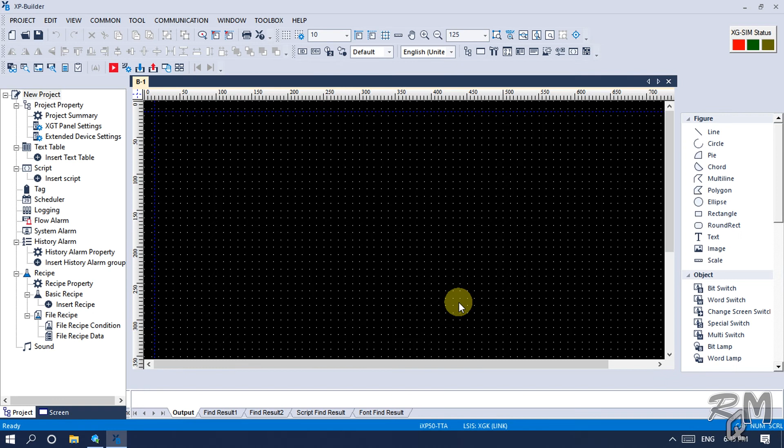In XP Builder, this main black window is the HMI screen and our working area. On the left side is the project window tree, whereas on the right side there are a lot of drawing tools and HMI objects like switches, indicators, etc. Now I will create the start and stop button by using the object tool.

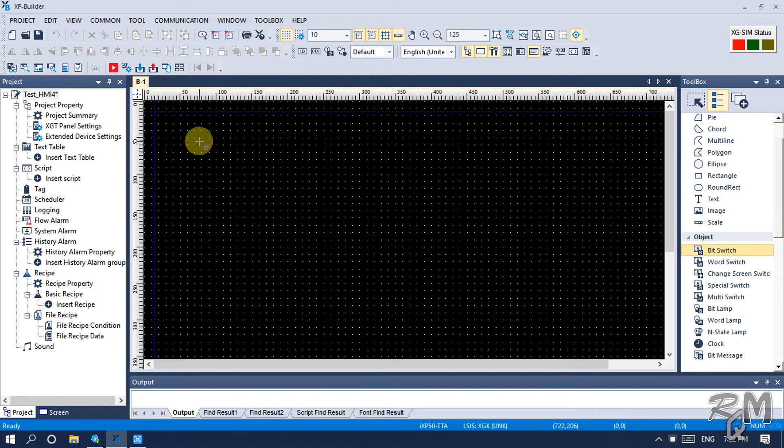Select bit switch, click and hold the mouse button and drag to create a bit switch. As I release the mouse button, the bit switch property box will open. Here enter the address of the start button. Come back to XG5000 logic. You can see the name of the input, but there is no address.

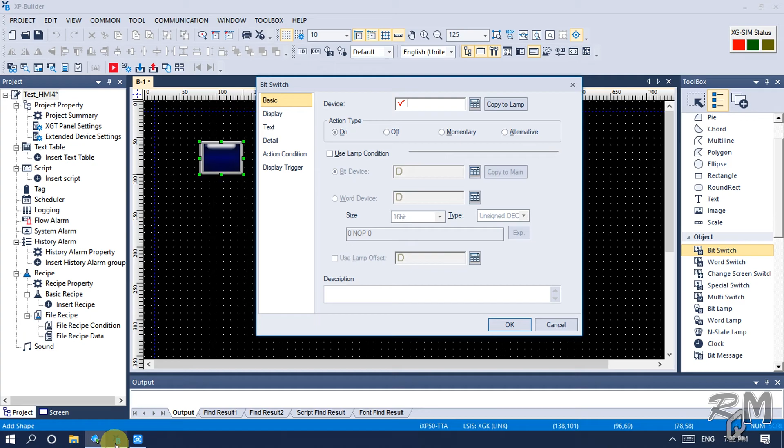To make the address visible, click on the view menu and then click on devices/variables. Now you can see addresses and names of all objects. Start input address is P00000. Go to XP Builder and enter P00000 in the device box and for action type select on.

Click on display, uncheck use reverse image. On state is bright and off state is dark, then click OK. Click again bit switch and create another switch for stop. I think it is better to create a copy of the start switch to get the same size. Copy with Ctrl plus C keys and paste with Ctrl plus V.

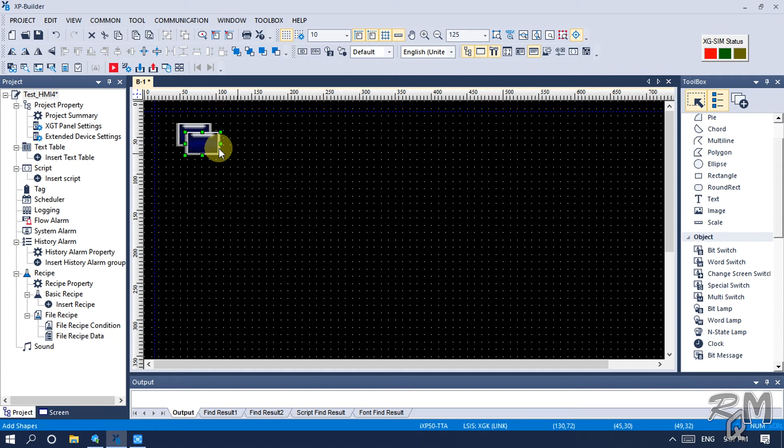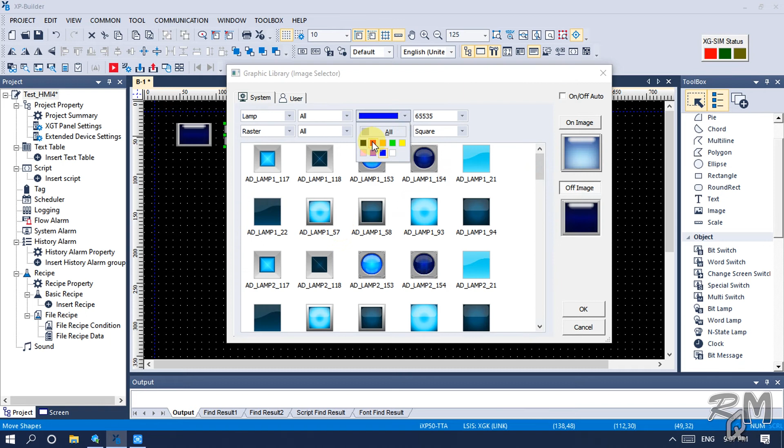Place the stop switch on the right side of the start switch. Stop input address is P00001. Double click on the stop switch and enter address P00001. Keep action type on. In display, uncheck use reverse image. Then click on library. Choose color red. Change off image to dark red and on image to bright red and click OK.

Now it's better to test these switches. Make sure XGSIM is on, the simulator monitor button is active and it is in run mode. Now run the HMI simulator. After loading, you can see two buttons in the HMI screen. When I click on the buttons, colors are changing. Move the HMI screen to the right side, switch to XG5000 and reduce the window.

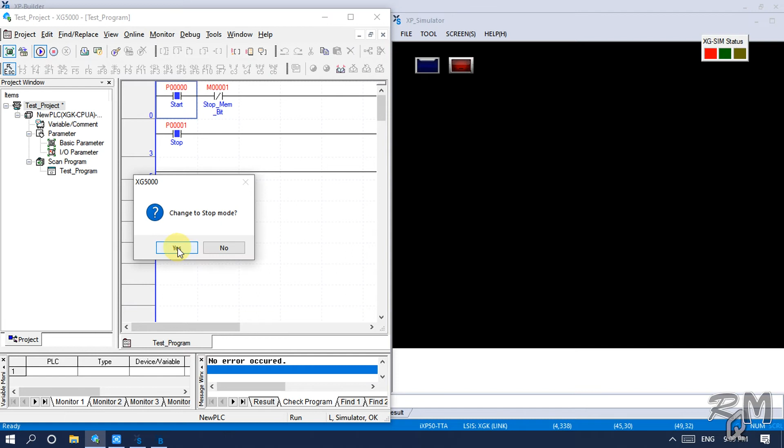You can see in the logic, both start and stop inputs are active. Now if I again try to switch off these inputs from the HMI, they will not switch off. To deactivate these inputs, I have to stop my PLC simulator and start again. Again I click on the start button, the input switched on, but it is not switching off. Same thing with the stop input. It is not right for my logic.

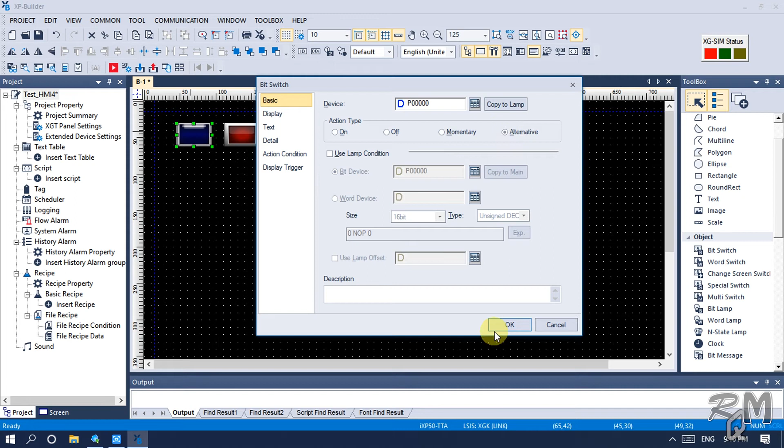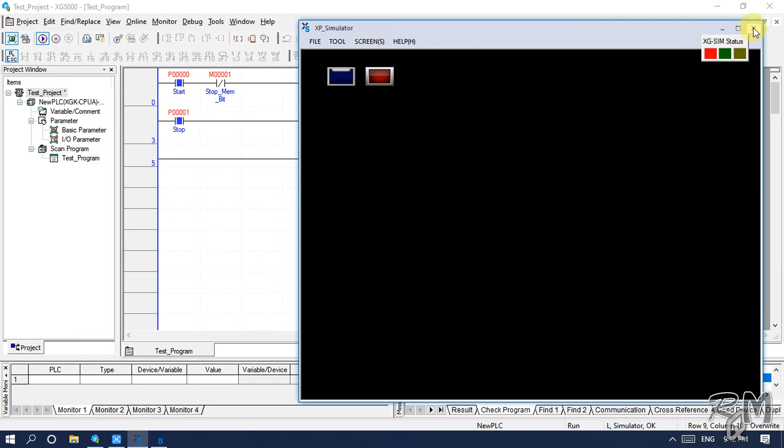To make it right, close the HMI simulator, double click on the start switch and change action type from on to alternative and click OK. Do the same with the stop switch. Run the HMI simulator again. Now I will test both switches with the logic. Now both are working fine. Confirm start output. Start memory bit is also activating. Switch off both inputs and close the HMI simulator.

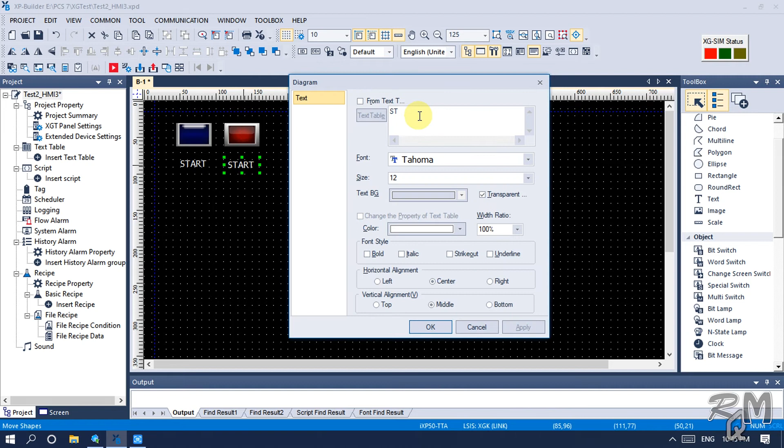Now I will label both switches. Click on text, then click and hold the left mouse button and drag, then release the left mouse button. Type start and click OK. Move it up, copy and paste start and move it under the stop button. Double click and change the text to stop. Check on bold and click OK. Double click on start and make it bold too.

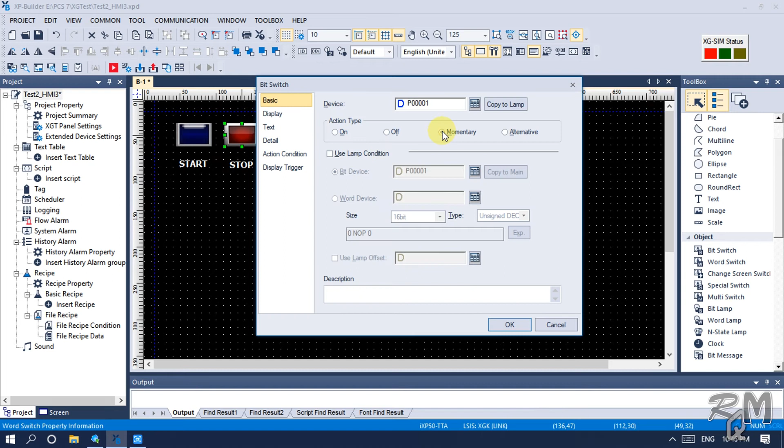Now double click on the start switch. Regarding action, in PLC logic momentary action is usually recommended. It is like a push button. When you keep it pressed, it remains on and when you release, it becomes off. So I will change action type to momentary. Also change action type to momentary for the stop switch. Now save the project and run the simulator.

Verify logic functionality with HMI. Start switch activating start input and stop switch activating stop input. Scroll the logic to the left side to check outputs. Click on the start button. You can see the start memory bit is also activating, which is good. Stop switch is also activating the stop memory bit.

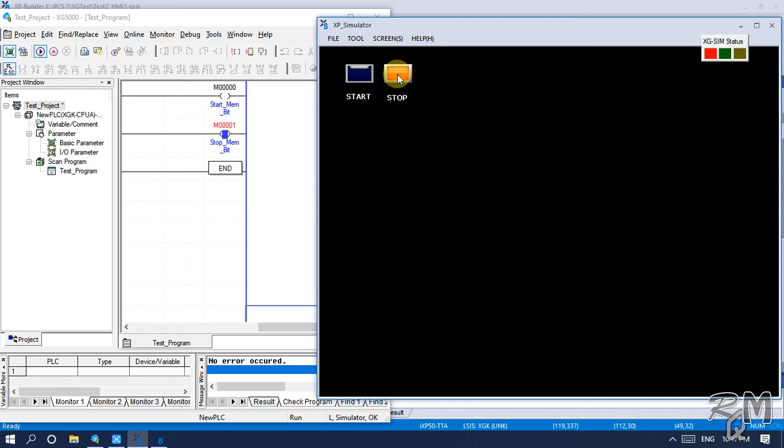Now I will create latch logic to hold the start memory bit. First create line space after start ladder logic. Left click on left side of ladder, it will select complete ladder. Now drag this ladder down.

You can see caution sign and ladder is not moving. It is because currently XG5000 is online and PLC is also running. Stop PLC and deactivate monitor button. Select end ladder also with shift key and move both down.

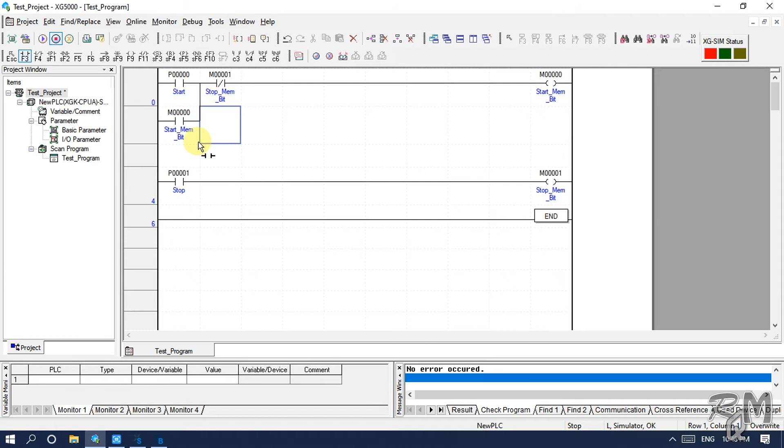Now select vertical line and click after start input. To create latch logic, I will use contact of same output coil, which is start memory bit. Select normally open contact and click on second step and select start memory bit from variables table. Click on arrow and select stop ladder and move one step up.

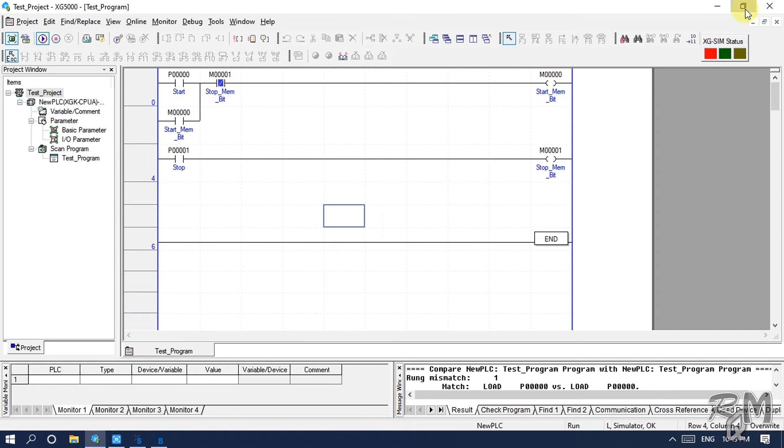Now go to project and save project. Click on monitor button, then click yes, click OK. Change PLC mode to run. Come back to HMI screen, click on start button. Input is activating but output is not latching. This is because after change I didn't write or download changes in PLC.

Stop PLC, click yes. Now click on write button, click OK. Now run PLC and again check start logic. Now you can see latch logic is working fine. Now click on stop button to unlatch the start logic.

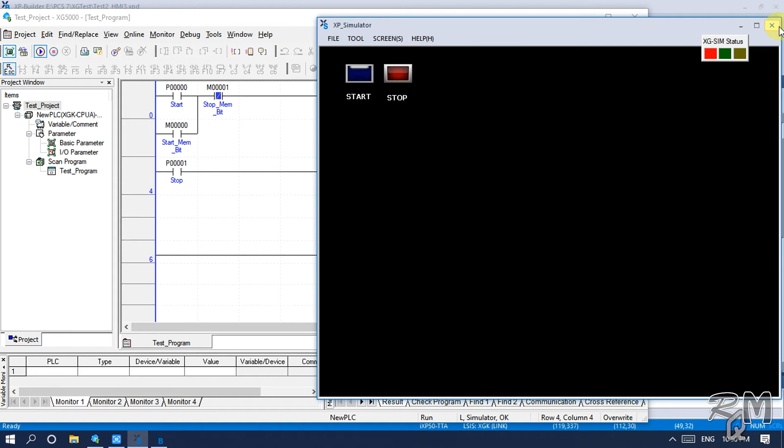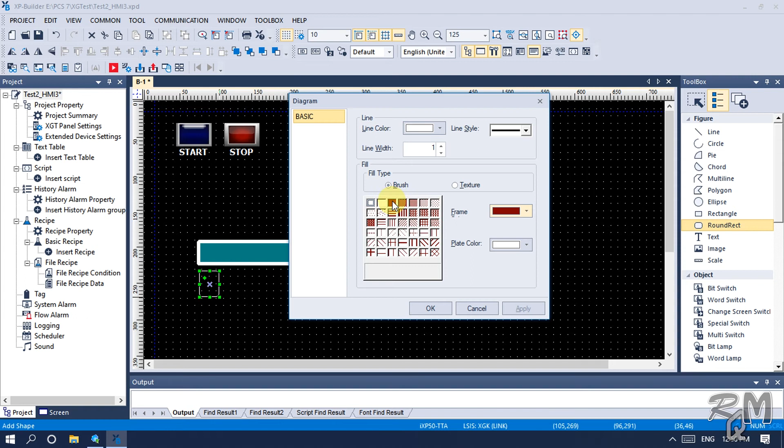It is better to create HMI project first, then create its logic. Select rectangle and draw rectangle for conveyor belt. Choose color, select straight line and increase the width of line, then click OK. Now create conveyor motor with round rectangle tool. Choose fill color and click OK. Create small shaft with rectangle tool and fill with different color.

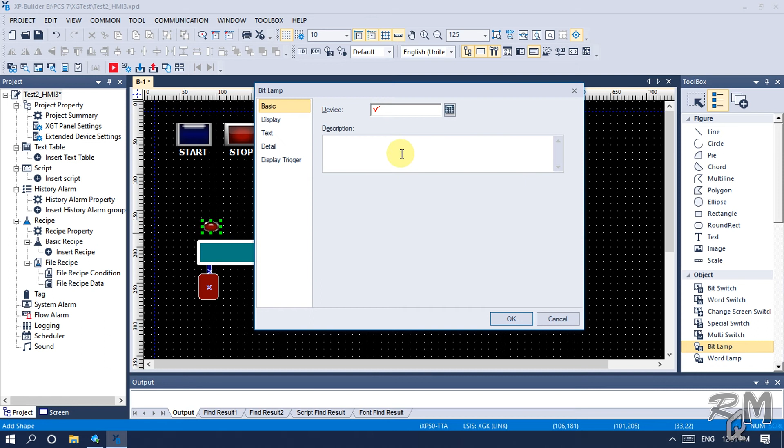Select motor and bring it in front. Here I will create feed sensor indicator. From object list, select bit lamp, create feed sensor lamp. I will assign address later after creating logic. Click cancel. Create copy of feed sensor lamp with Ctrl C and Ctrl V and move it to position sensor place. Now select polygon tool and draw filling station and fill it with solid green color.

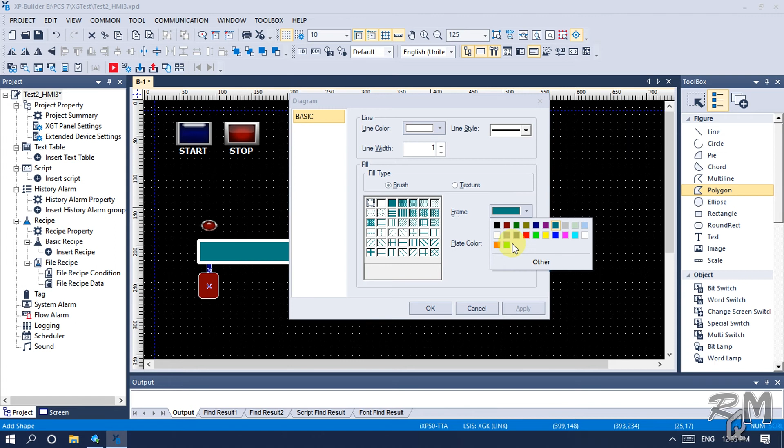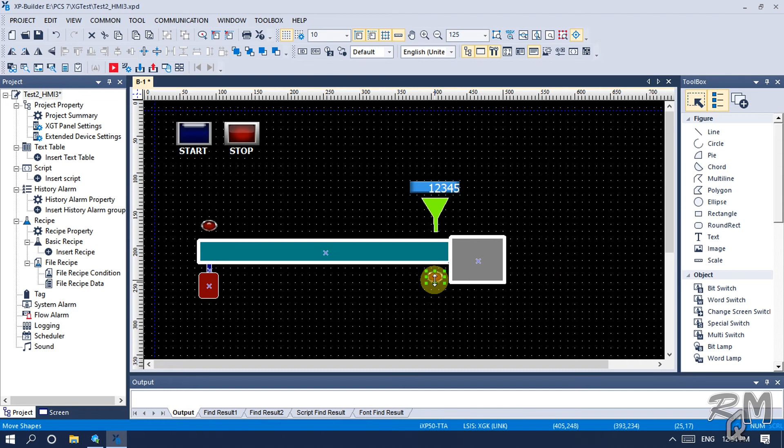From object list, select numeric display and create fill timer display above the filling station. I will assign address later. Select rectangle and draw count section after filling station of conveyor. Fill with solid gray color and increase width of line to 5. Create copy of position indicator and place above the counter section. It is count sensor indicator.

Now create counter. For this, I will copy the filling timer indicator and place inside counter section rectangle. Now save the project. One thing left, that is motor indicator. Select bit lamp and place it on the motor. Don't assign address, resize the lamp. Now save the project again.

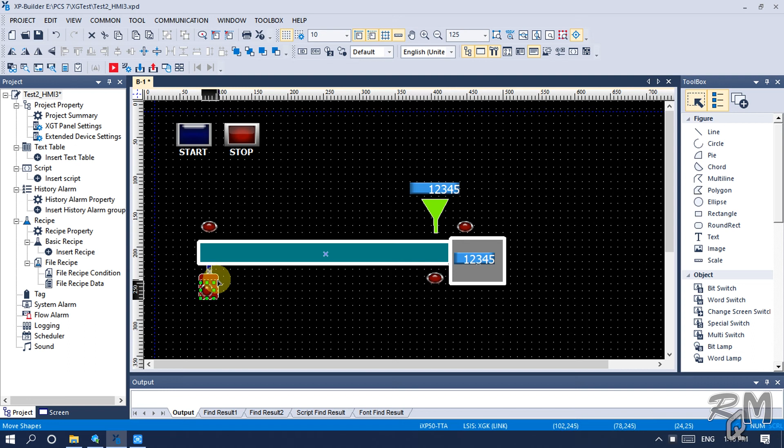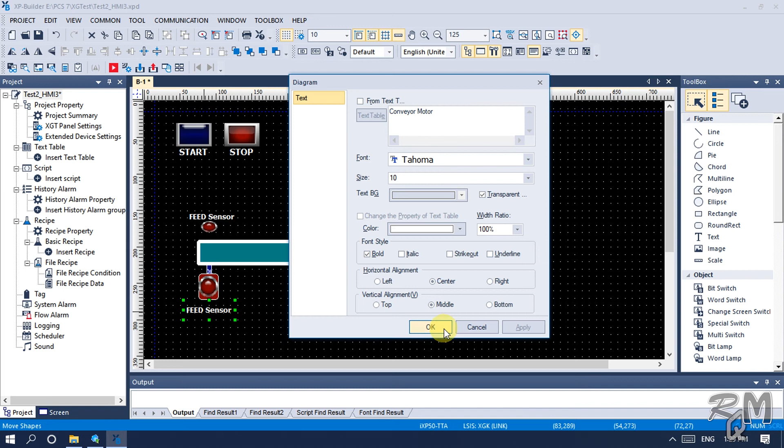It is better to label all objects of HMI. Select text and drag with the left mouse button above the feed sensor. Type feed sensor and make it bold, then click OK. Again double click and reduce the size of text. Create copy of feed sensor text and change name to conveyor motor. Create another copy for position sensor.

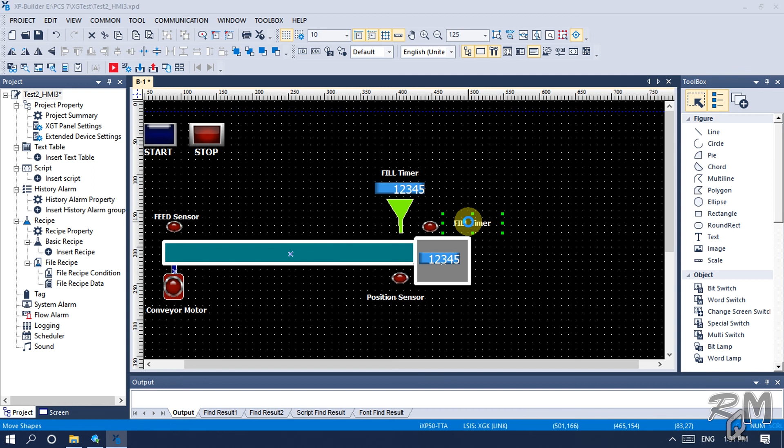Create copy for fill timer and place above the timer. Create copy for count sensor and place right side of count lamp. Finally, create copy for counter and place under the counter. Resize the counter and fill timer indicator. Double click, go to text option and check center in horizontal alignment section. Same do for counter.

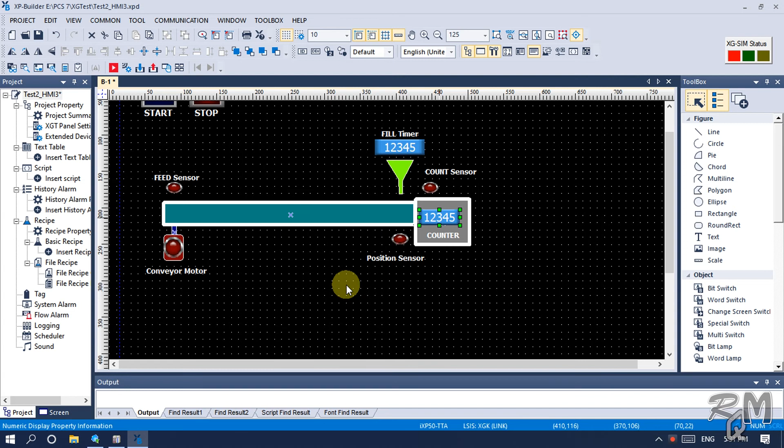Now I will create logic for these components. First, I will create for feed sensor. Deactivate monitor button and make sure PLC is in stop mode. Select normally open contact. Click under the stop ladder. Enter device address P00002. Click OK. In variable box, type feed_SENS, feed sense, and in comment type feed sensor.

Then click OK. Select coil and click in front of feed sensor. Write address M00002, variable name feed_sense_mem_bit, and comment feed sensor memory bit. Then click OK. Now create logic for position sensor.

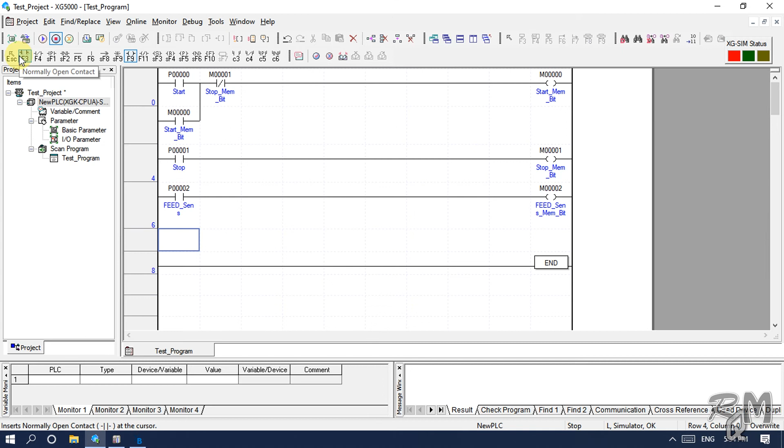Select normally open contact. Click under feed_sensor. Enter address P00003, variable name position_sense, and in comment type position sensor. Click OK. Add coil and assign address M00003, variable name position_sense_mem_bit, and in comment type position sensor memory bit. Select end ladder and move it down.

I will create logic for count sensor with same method. First, create input, assign address P00004, variable name count sense, and in comment type count sensor. Click OK. For output, choose coil, assign address M00004, variable name count_sense_mem_bit, and type count sensor memory bit.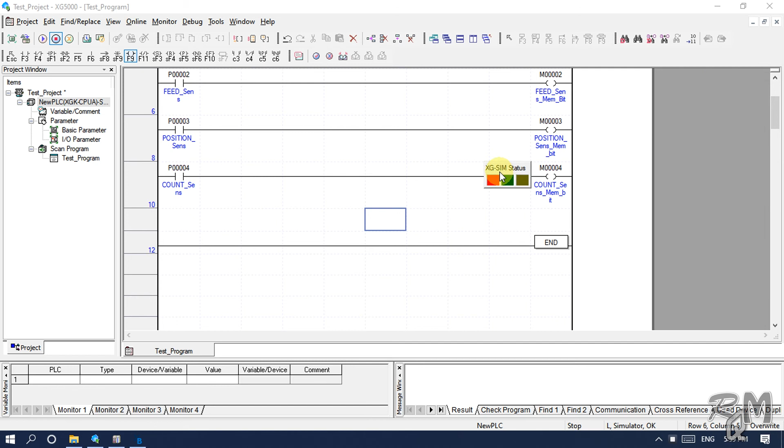Now I will download this logic in the PLC simulator. Make sure XGSIM is active, then click on the right button to download the logic in XGSIM. Click OK. Now activate the monitor button, then run the PLC. Let's see whether this logic works with the HMI or not.

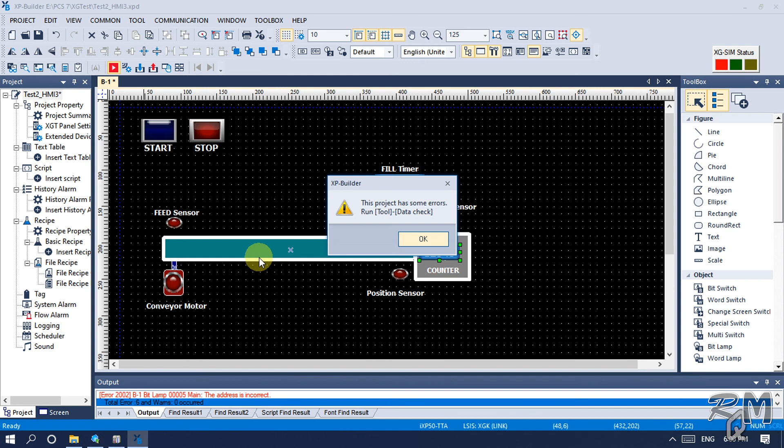Go to XP Builder and run the HMI simulator. It is not running due to some errors. Click OK. If you see the output window at the bottom of the main screen and scroll up, you can see a list of all 6 faults. The reason for these faults is the same, as you know. I assigned addresses only to the start switch and stop switch, but I didn't assign addresses to the remaining 6 objects.

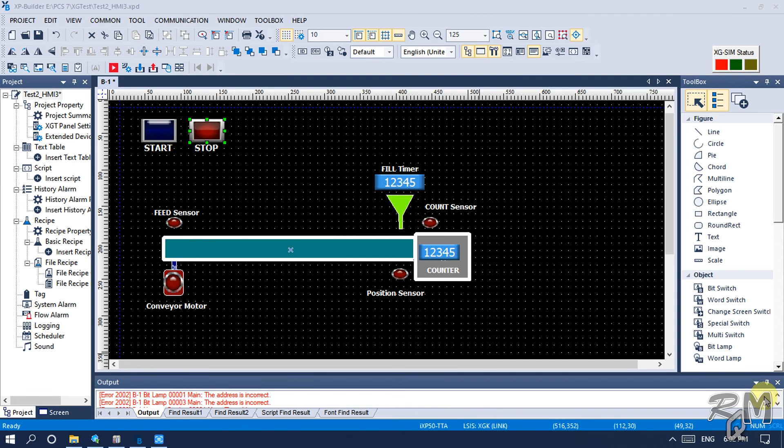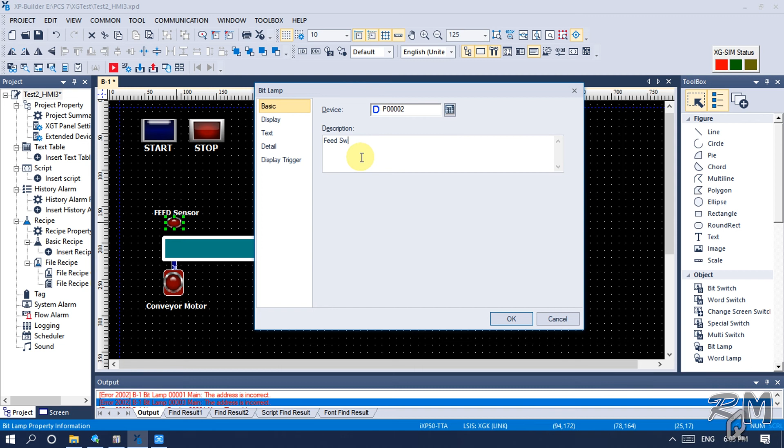Now I will assign addresses to these objects. Double click on the feed sensor and assign address P00002. Similarly, assign address P00003 to the position sensor. Then assign P00004 to the count sensor. Again double click on the feed sensor and add some description: feed sensor. Then add descriptions for the position sensor and count sensor.

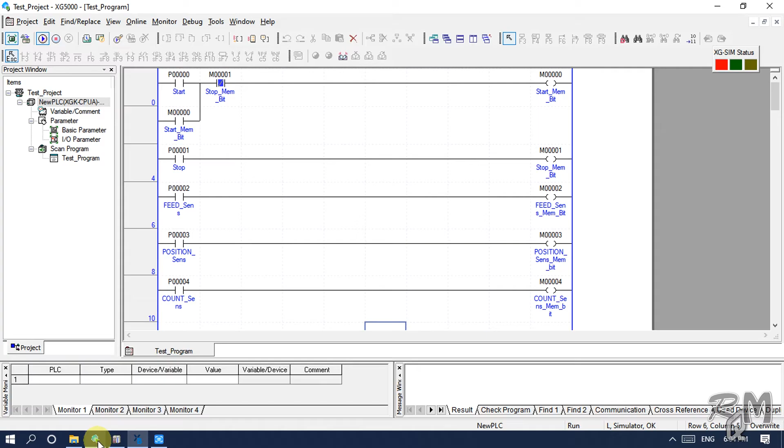Now save the project and run the simulator again. There are still errors, but reduced to 3 now. It is because I still didn't assign addresses to the conveyor motor, fill timer, and counter. First I will create logic for these 3 objects, then I will assign addresses. Deactivate monitor and stop the PLC.

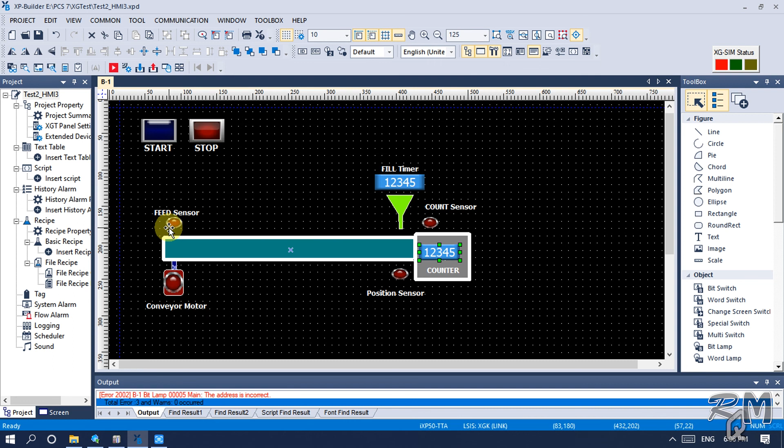Select a coil for the conveyor motor output. Assign address P00040. In variable and comment also type conveyor motor. I want this motor to start when the feed sensor becomes active. So I will add a normally open contact and assign the address of the feed sensor memory bit. Save project.

I want that when any object, bottle or can, comes in front of the feed sensor, my conveyor motor starts, and when this object reaches the position sensor, the motor should stop for filling. So I will add a normally closed contact of the position sensor memory bit to stop the conveyor motor. When the object comes in front of the position sensor, filling will start for a certain time. For this purpose, I will add a timer in the logic. First move the end ladder down to create space.

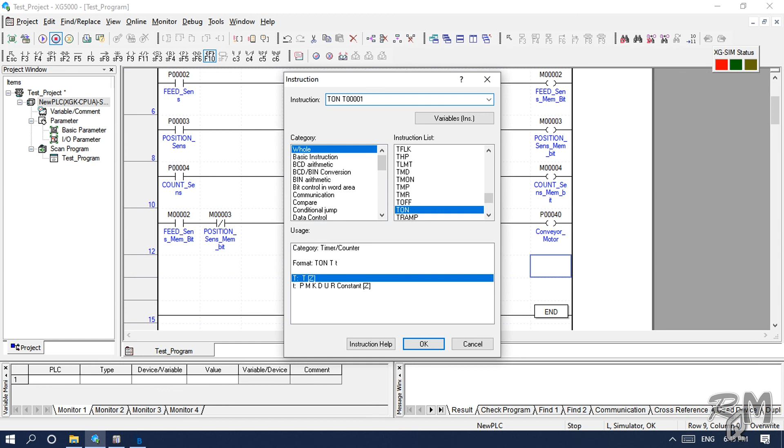Select function block, click on the right side of the ladder, type TON to search the on delay timer block. Select TON from the instruction list and click OK. You can see an invalid operand count error. It is because I didn't add operands with TON. Now with TON, assign timer address T00001, then space 30, which represents 3 seconds. Add a normally open contact of the position sensor to activate the timer.

In the conveyor motor logic, I forgot to add a latch contact after the feed sensor memory bit. In the current logic, the conveyor motor will stop immediately after deactivation of the feed sensor. First move the timer logic down, select vertical line and connect after the feed sensor memory bit. Then add a normally open contact of the conveyor motor. It will latch the motor until the position sensor activates. Then the position sensor will activate and start the timer. After the timer finishes, the conveyor motor should run again to move the object to the count section.

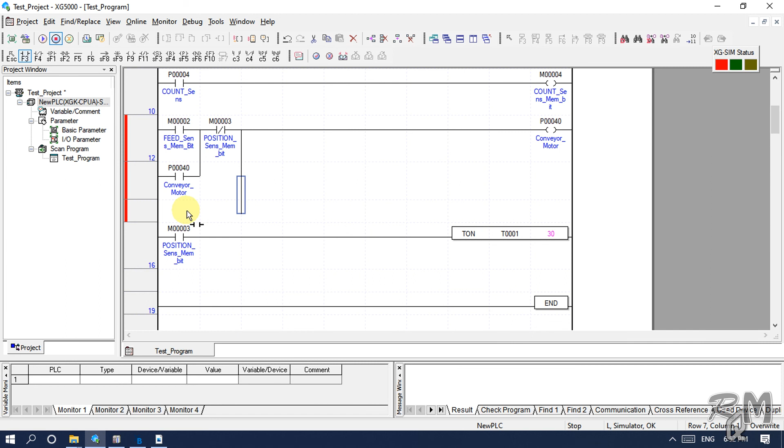Connect a vertical line after the normally closed contact of the position sensor memory bit, then add a normally open contact of the timer. I cannot find the timer in our variable and device table because I didn't add it to the table. So first add the timer in the table, type T0001, variable name fill timer, and in comment also type fill timer. Add a horizontal line to complete the logic.

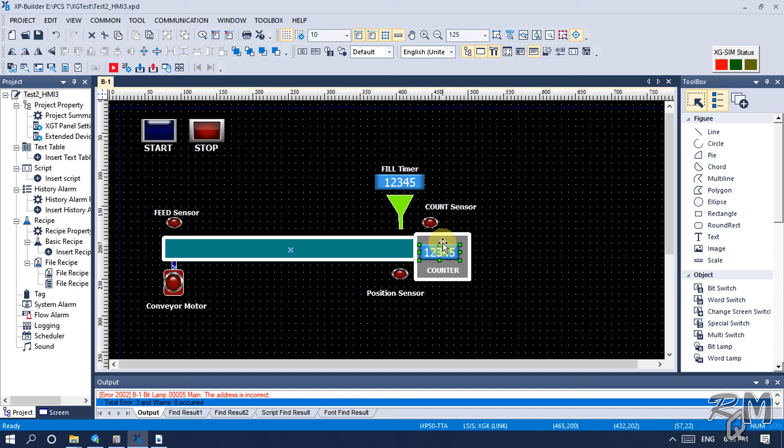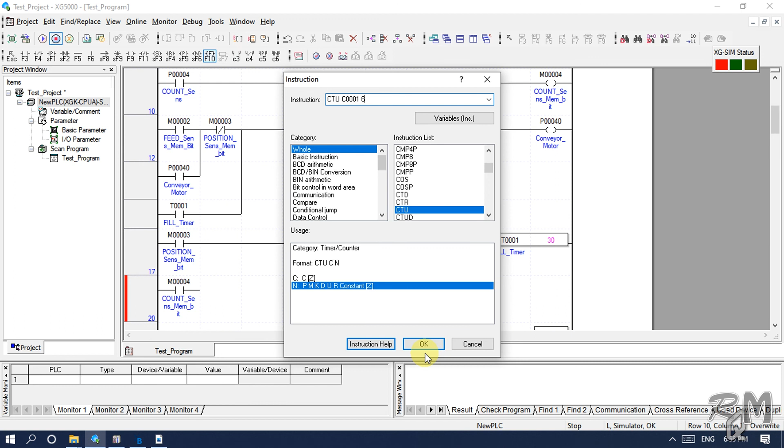After this, I will create the counter logic. For this, first add a normally open contact of the count sensor memory bit, select function block and click the right side of the ladder. Type CTU, it is the up counter or count up function block. Assign address C0001 and number of counts 6. Then click OK. My counter logic is created.

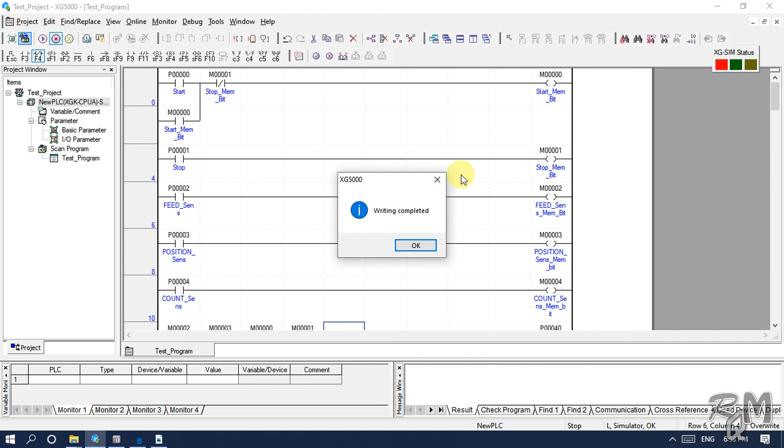In the current logic, in motor operation, I didn't consider the start and stop logic. Now I will add some protection in the conveyor motor logic. I will add a normally open contact of the start memory bit and a normally closed contact of the stop memory bit. After this, save the project. Now click on the write button to download the program. After this, run the PLC and click on the monitor button.

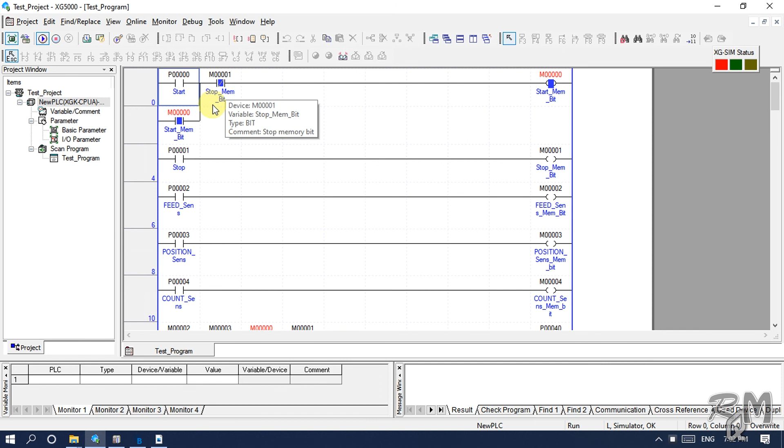Double click on the start contact and force it to true. The start memory bit becomes active and it is latched with its own contact. Now if I deactivate the start input, the start memory bit will remain active due to its latch contact. To unlatch, I will activate the stop contact. Double click on the stop contact and force it to true. You can see the start memory bit is deactivated now. Again deactivate the stop contact. Okay friends, in this part we created our HMI screen objects and also created our logic program.

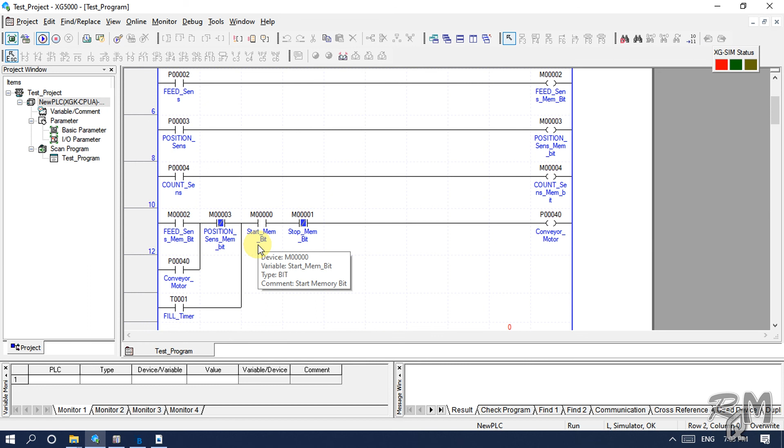Hope you understand till now. If you are unable to get something, then please go back and watch the video again. Hope it will bring you out of trouble. In the next part, I will test my logic with the PLC and HMI simulator.